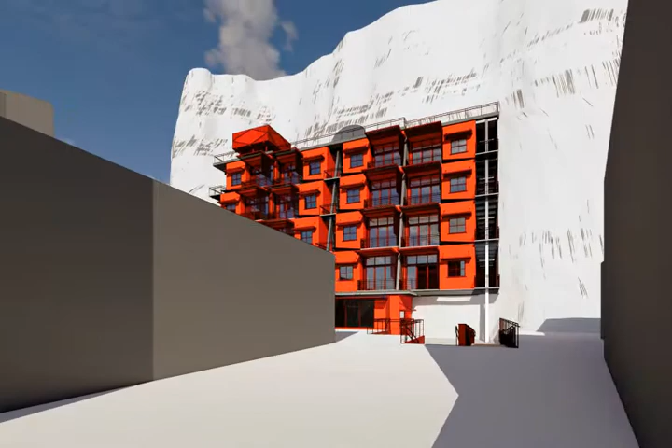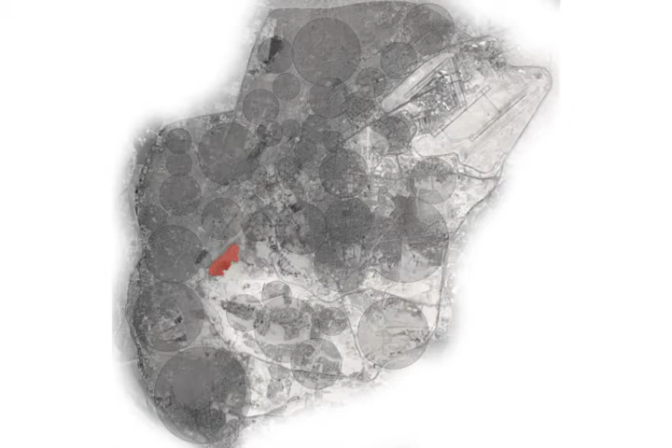Built into the side of the Mokattam Mountains, which borders the district, the Mokattam Cliff Residence provides the Zabaleen an environment for these steps to occur and operate from. And the process all starts with men and their sons heading out to gather early in the morning. Each gathering family has its established route and territory, and with the many roads, it is fairly easy to get around Egypt's capital. The trash is loaded onto their trucks and brought back to Manshayat Nasir.

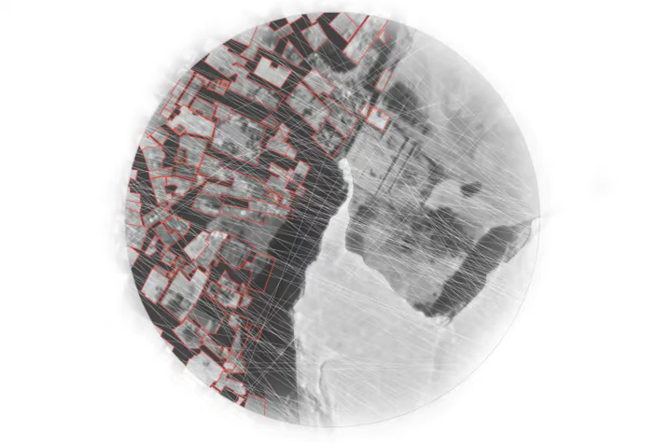The main road cuts right through the district, with many side streets branching out from it. Trucks piled high with towers of rubbish wind through these cluttered passageways, passing by small businesses and apartments on the way to their destination. In our case, it's the Mokattam Cliff Residence along the eastern border of the district. The site of the project occurs at an intersection, where the buildings of Manshayat Nasir meet the mountain's cliff face. As is normal of Rubbish City, garbage is continuously brought in.

The importance of said garbage had a significant influence on the design of the residence. The choice to build into the cliff was one of them, acting as a response to the common occurrence of the Zabaleen bringing garbage into their homes to sort. Having garnered inspiration from the monastery of St. Simon half a mile south of the site, where the Coptic Christians had built their church into the mountain to keep out of Egypt's harsh sun while worshipping God.

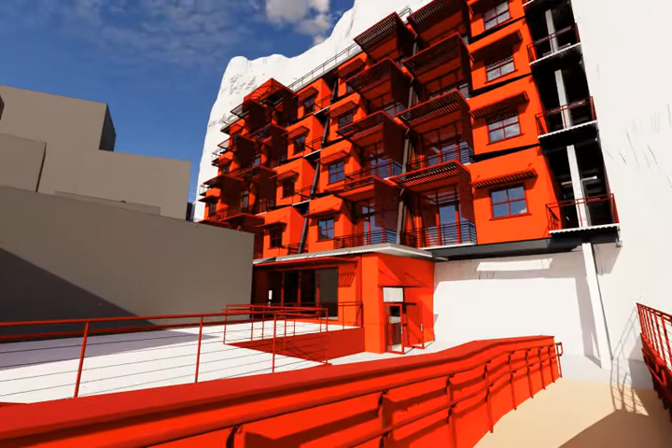By building within the cliff, temperatures are more stable and cool, and the garbage stays far away from the sun's rays, significantly slowing dangerous bacterial growth brought on by decaying organic matter found within the trash. The residence being embedded into the cliff resulted in the design choice to terrace each of the floors, echoing the slope of the cliff face.

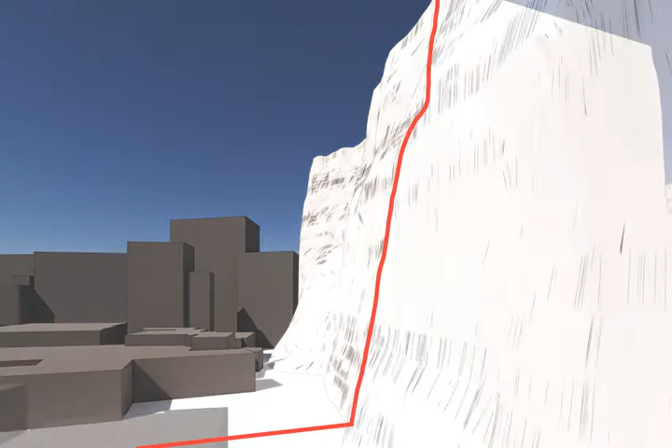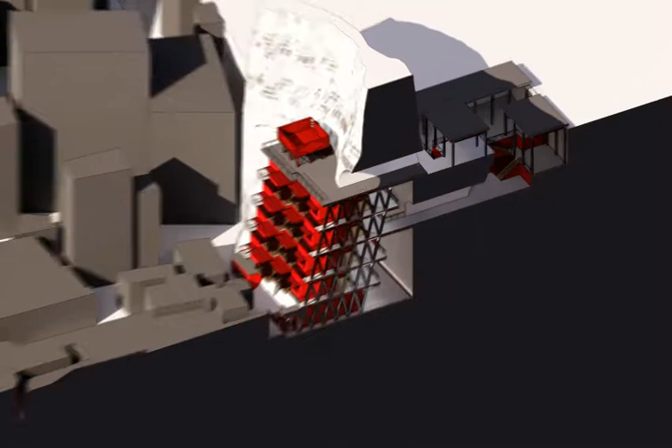Large quantities of garbage are required to be moved for sorting. It's grueling work. To ease the physical burden, some families cleverly use rope harnesses to lower bags down from upper floors to the ground. The cliff residence expands upon this solution, allowing for garbage to be moved both up to the residential units for sorting and back down once completed. Connected to the entryway is the interior chamber capable of such a task.

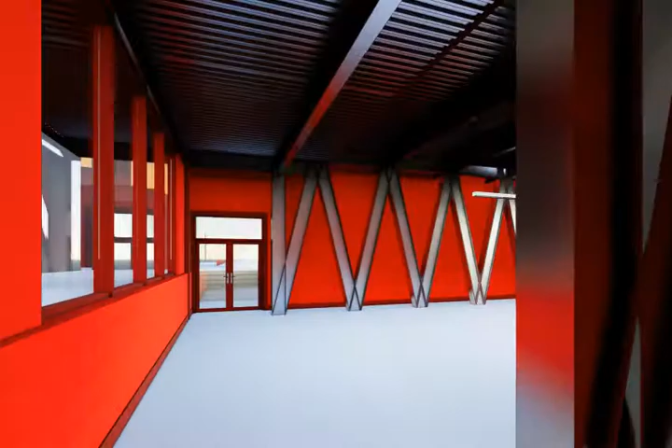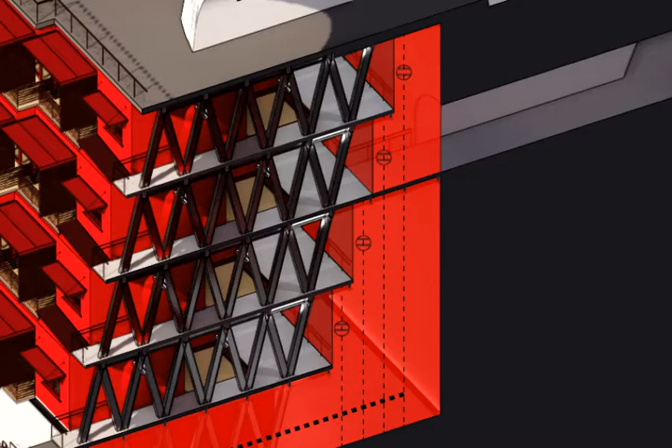A block and tackle pulley system has been set up to accommodate this need, giving a distinct mechanical advantage that amplifies the force applied to the rope, making it much easier to operate and move the garbage between levels. Each floor has been offset, continuing the terracing from the exterior facade in an inverse manner, allowing for the pulley systems to have full operational range without interference with one another. Adjacent to the pulley systems are the residential units which face the district, emerging out of the stone.

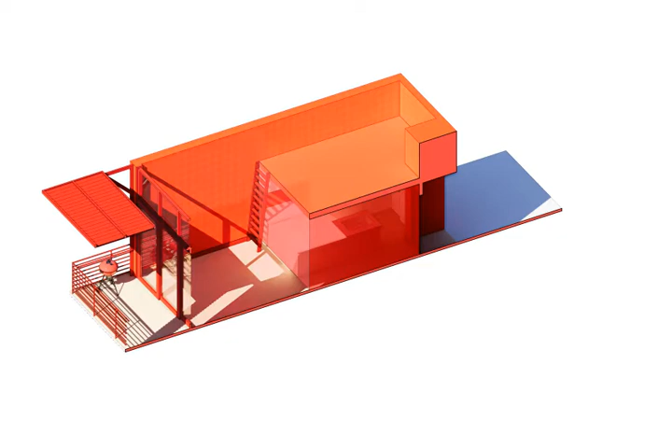The unit sorting area is accessible from the hallway, recessed down into the floor, keeping the garbage contained. Within the unit, the bedroom and bathroom branch off from the main core. The core gestures out to the district through the directionality of the space leading into the large glass doors. The kitchen has a low ceiling height, compressing the resident down before expanding the space as it blends into the living/dining room. Resting above the kitchen is a small sleeping loft for the children, and at the end of the core is the balcony, which can be fully opened, extending the space within the unit beyond.

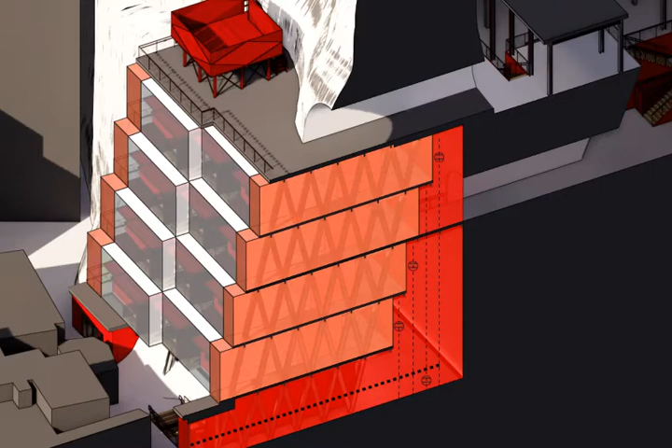The sorting areas are attached, but not held within the unit itself for health and safety purposes. It also allowed for added efficiency in moving the garbage up or down the building. Breezeways were introduced beside the sorting areas to further cool the garbage and to circulate the air so it does not stagnate and become pungent.

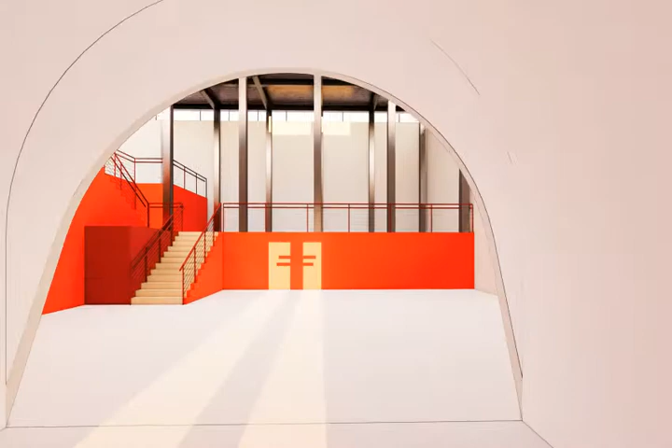After sorting through and categorizing the garbage, the plastic can be moved to the processing area to be cleaned, melted, and extruded into plastic filaments ready to be sold or reused. The area emerges on the other side of the cliff, climbing out onto the plateau hidden behind the mountain's face. A tunnel bridges the two sides of the cliff.

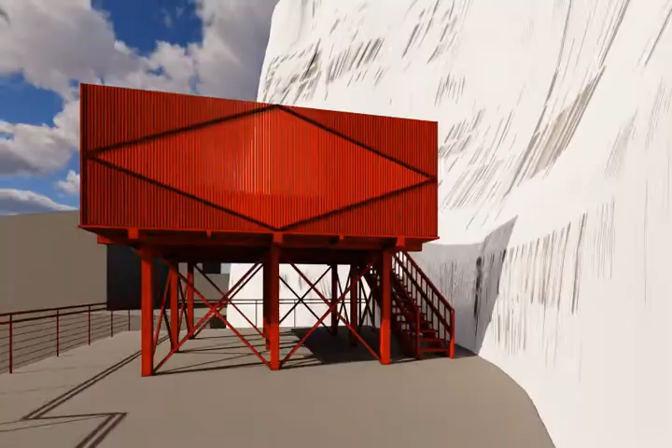Beyond it, on the rooftop, like with many of the other buildings in the area, sits a familiar sight of a pigeon coop. Kept on the rooftops of buildings in Cairo, the Zabaleen use them to raise pigeons as a hobby. Watching them race through the sky provides a great source of entertainment. Within the city of rubbish collectors, the Mokattam Cliff Residence does not shy away from the unique lifestyle of the Zabaleen, but rather accepts and embraces it.